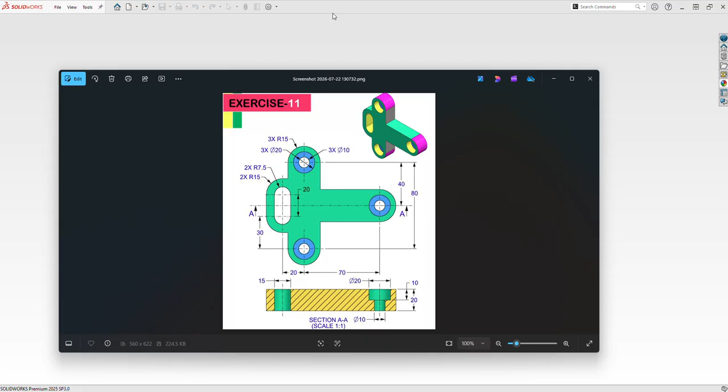Create the base sketch. Go to SolidWorks, create a new part, and select OK. Take any plane, front plane sketch, and create some center lines for reference.

Select these lines for construction. Set them to for construction. And make another center line at this point. Select OK. Smart dimension.

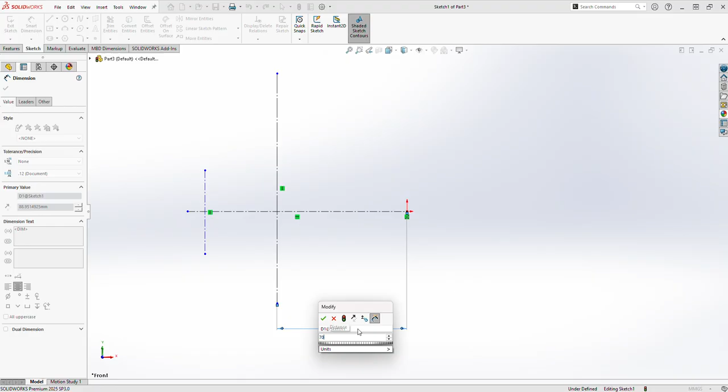The distance between these two lines from origin is 70 mm, and this line from origin is 90 mm.

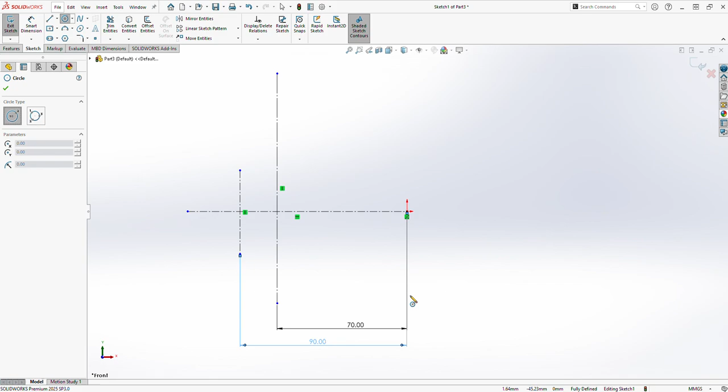Make two circles here. First one, second one. Here, make two circles. And create a slot at this line.

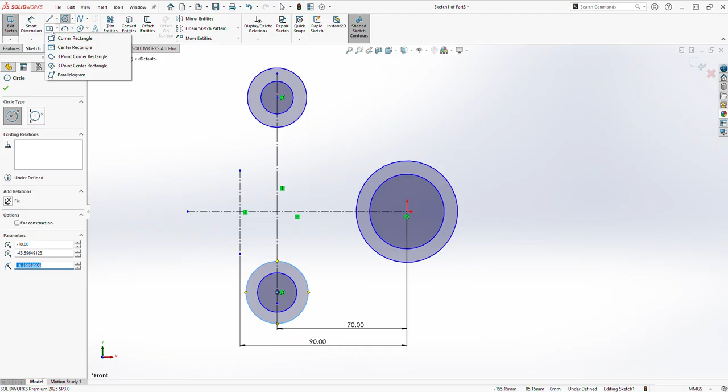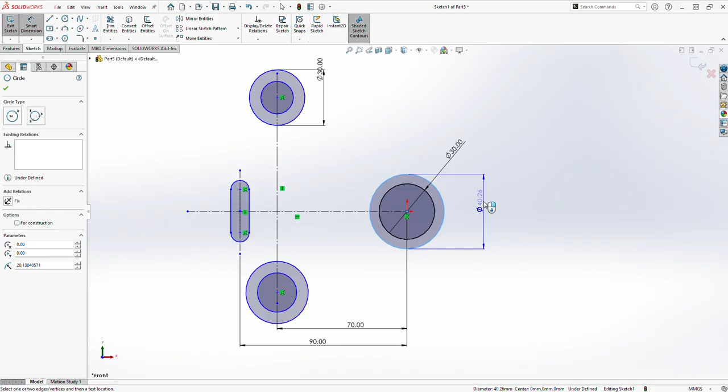So first we go to the dimension tab and make the dimensions. The bigger one's dimension is 30 mm. The smaller one is 20 mm.

And the slot dimension is 20 mm, you can see in the exercise. And the slot radius is 7.5 mm. Make two circles here.

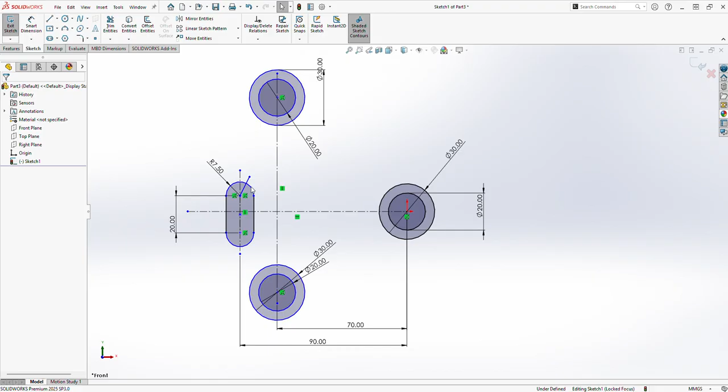The dimension is 30 mm. So its diameter is 30 mm. The distance from the origin is 40 mm.

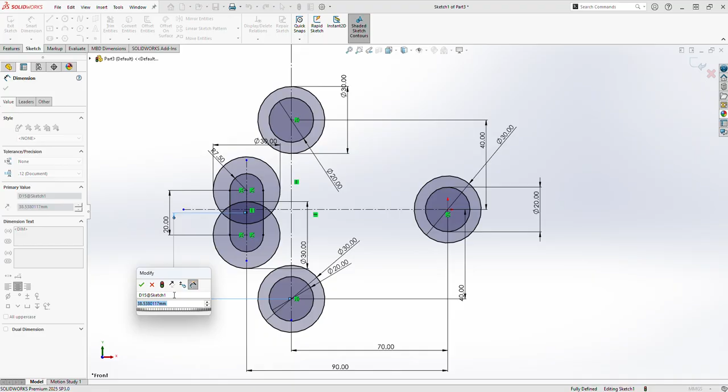And the slot distance from this point... sorry, it is not that point. This point to this point is 30 mm. Create some lines to match these profiles. Line.

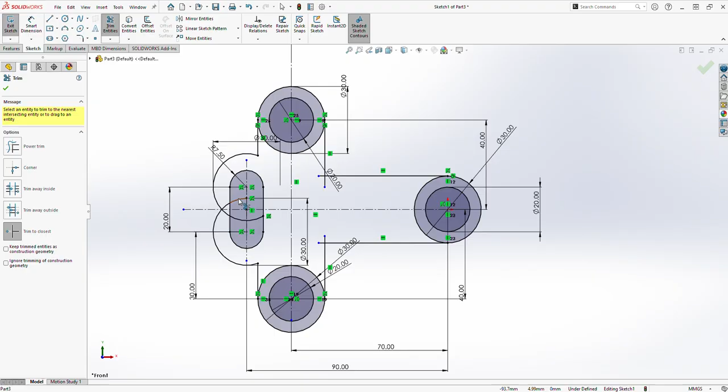Go to trim entities and trim the extra part. Go to the line tab and create a sketch on this line, from this point to this point. Make it vertical. Go to trim entities and trim this entity.

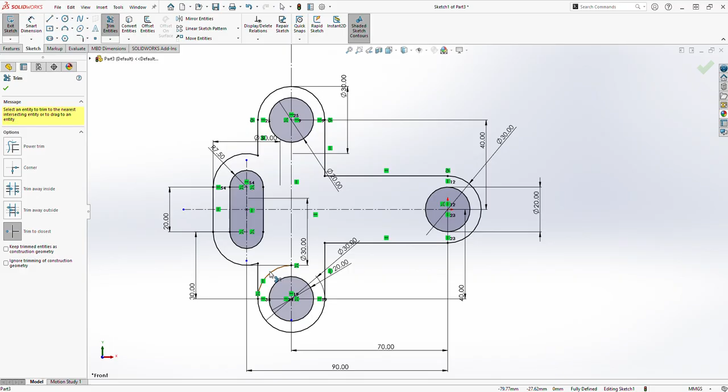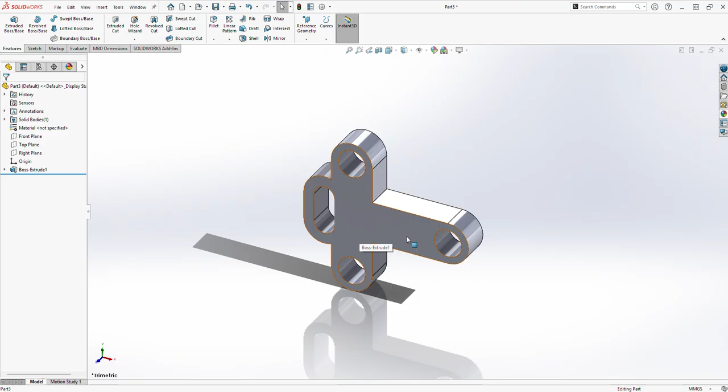Go to the features tab, select extruded boss/base, extrude it up to 20 mm. Select this face, sketch, and create circles at this point and this point of 10 mm.

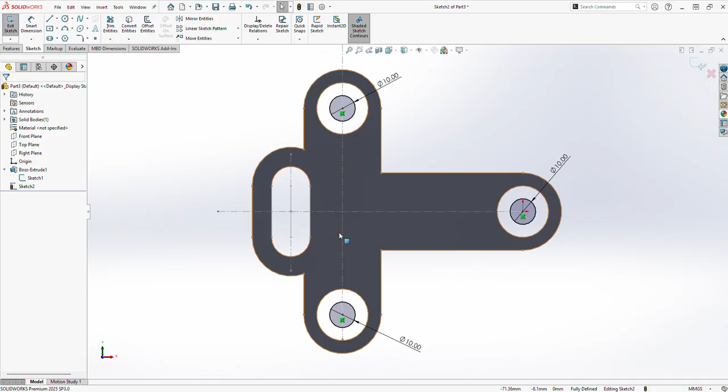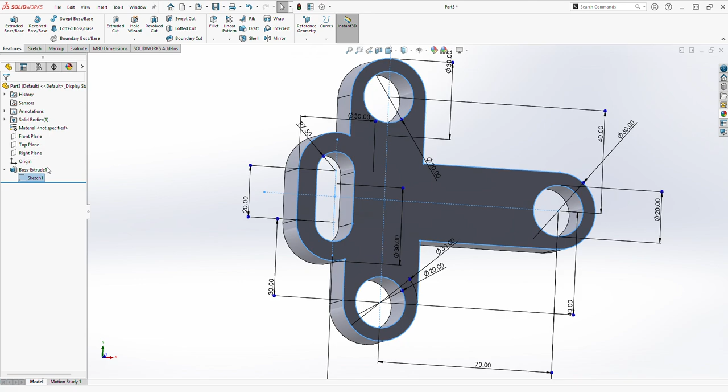Go to extruded boss/base, click here, hide the sketch, and you can see. Go to sketch and make three circles. First one, second, and third one. Okay. Make the dimension of the three circles 10 mm only.

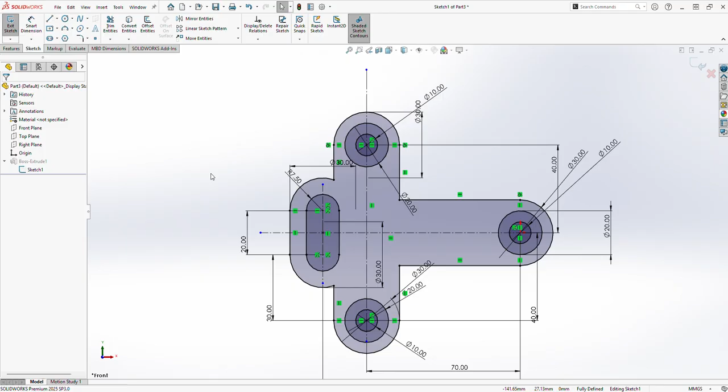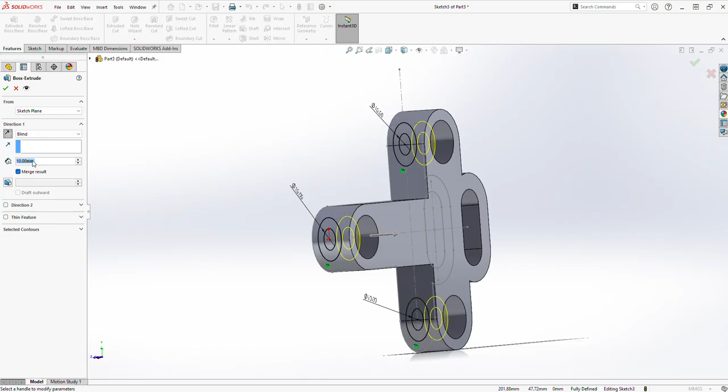Select these corners, this corner, and this corner. Convert entities. Go to features tab, extruded boss/base. Reverse direction. Extrude it up to 10 mm. Okay. You can see the exercise is completed.

Congratulations. We have successfully completed SolidWorks exercise 11 from a 2D engineering drawing.